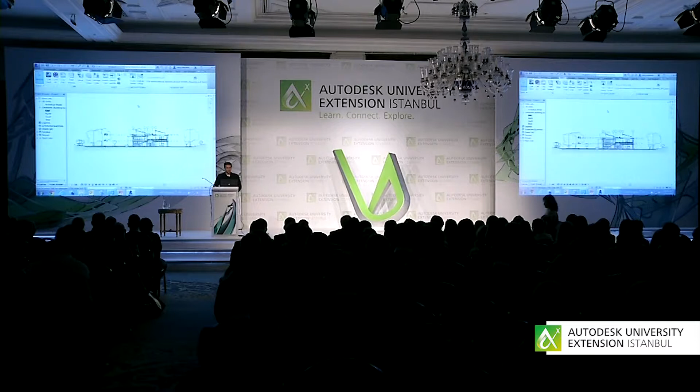What's really important here is that I need to copy the important elements. So I'm using the Copy/Monitor tool available under the Collaborate tab, select my link, then I need to copy. The first thing to start with is the grids and levels. These are the most important things. There's a little thing you have to do here first in the options. These are the 5 types of elements that can be copied and monitored: levels, grids, columns, walls, and floors. Structural engineers will not need anything else from the architectural model other than these 5 elements.

What you have here is a mapping tool. It gives you the ability to control how you want to copy when you copy/monitor. For example, I have a type here in the original file. How do you want to copy that into my structural file? I would say here, just copy the original type.

I don't want to change anything. When I talk about levels, usually the architect will use the finished floor level, but we as structural engineers want to use our top of concrete level, for example. So here I have the capability to make it minus 10 centimeters, or 100 millimeters, down of the architectural finished floor level. And then I can give a prefix, so I give it here top of concrete underscore, so whenever the levels are copied, they will have the initial top of concrete to differentiate them from the architectural levels, so I don't get confused.

Next thing, I'm going to grid. I'm fine with the mapping. I will continue with the grids, and I will give it just a prefix S for differentiation. I'll keep the columns right now as it is. I press OK, then I go to copy, select multiple. I will do this window selection and use this powerful filter tool to filter only the elements I want, so I don't have to pick elements one by one. I just select grids and levels, press OK, and finish. And Revit will automatically take care of copying that.

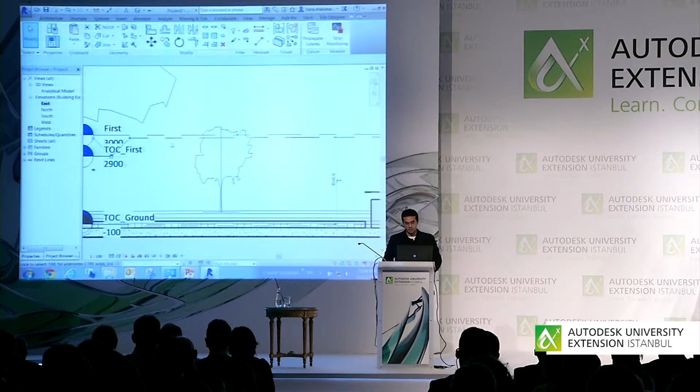If we move a little bit here to some of our levels, we will notice that these are our levels. I have top of concrete first, and up there the architectural levels. If I select that floor, you will notice this little symbol, this tracking symbol, showing me that this level is being monitored from the architectural model. In my model, I'm monitoring that level, so if any change happens to that level, I will be able to see it. The same happens here. I have the structural file, and the structural grids come to me.

At this stage, I need to create my views. It's not a problem. Let me just hit finish, go to view, create structural plans for the first, ground, and roof. And then I have my structural plans available. Let me hide the Revit link to show you something. Then I have my models. You notice that I have my grids only in one direction because I did that only from the east.

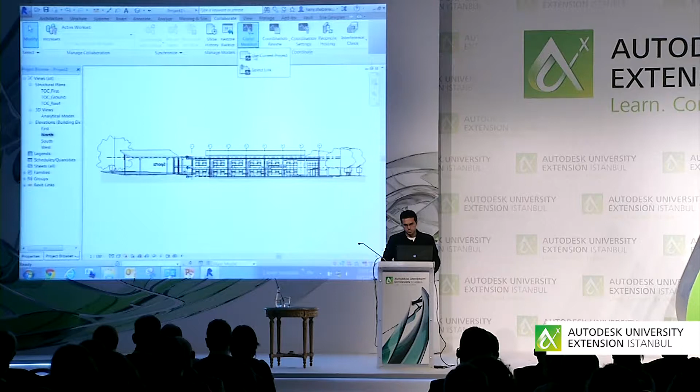So to complete that, I'm going to the north, the other direction, perpendicular to that. And I'm going to repeat that again: Collaborate tab, Copy/Monitor, select the link. I just need to press it again. Select the link, and it will open for me. At this stage, I will copy the rest of the grids in the other direction and also the structural columns. Before I do that, I'm going to the columns option.

Here you have the architectural column as it appears in the architectural file, and you have the mapping of it. So it depends how you want to copy that. You can keep it as concrete. In my example, I'm copying it to universal column, steel columns instead of concrete, because I am the structural engineer. I have control over that. I don't have to copy exactly what the architect is proposing. It's just a proposal. And for that column, I'll adjust it because I know it will be concrete, so I'll copy it as concrete. So I have control over that.

You have a little tick box here that's very useful. It's asking you to split the column by level. So if an architect creates a column from the ground till the 5th floor as one column, you know as a structural engineer that you need to split that column into different levels. So this option is very useful. You can just pick it and keep it in your system. Then I'll choose copy again, select my file, filter it. This time, I select the columns and the grids, apply OK, finish.

So finish now. If I go back to my top of concrete first, I have my columns, and also my grids are completed. So now I have my structural model and my grids, and both of them are monitored from the architectural model. Just to show you the split that happened, I'm going to hide this element. If I zoom in to any column, you'll notice that my columns are both monitored and split at my levels.

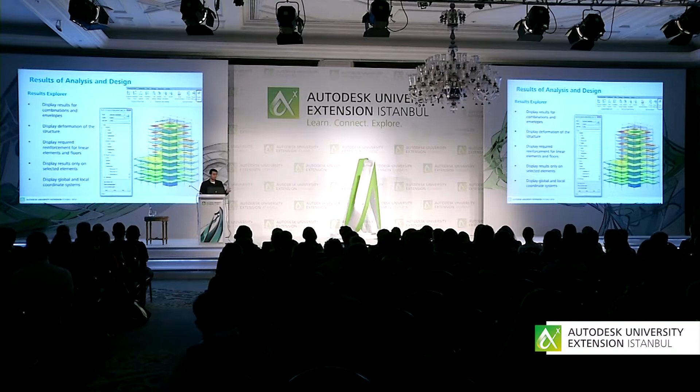So let's see now how this is actually happening. Now I'm in my Revit Structure. This is my physical model. I go to my toolkit, and by the way, you need to have an active subscription in order to access your cloud services. So once I do that, my model is being sent. First of all, Revit will check the integrity of my model, and if it finds any discrepancies, it will stop you and will say, there is something wrong. You have to check here.

So in my case, I have two errors in my model. First of all, I forgot to assign structural material to my floors, which is vital for my structural analysis. So I will have to assign structural material, definitely. So go to Revit Structure again, select the material and assign whatever material I want. And make sure that the mechanical information is available and assigned for that material. So here I've assigned a concrete material for my floor slabs. So here my concrete, I have my physical information, and the mechanical properties are identified here indeed.

The second thing is that if you have structural nodes that are not well connected together, you will get wrong information. Probably you'll get a failure in your structure. To address that, Revit 2014 actually introduced a couple of filters in Revit Structure to show you the unconnected nodes like these. They are under filters. They are out of the box. You can just activate them and give it a color. For example, give the unconnected nodes a red color. Once you press OK, then you have a visual report.

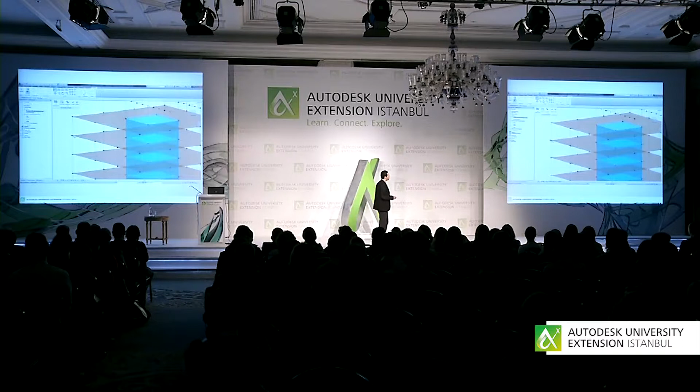So I have two unconnected nodes here. I can directly go and align them and make sure that my analytical model is correct. Again, for that column here, maybe this one doesn't appear in red because Revit automatically has created a rigid link between these two nodes. That's why it didn't appear in red. But to make it correct, I will connect them directly. So once I'm fine with that, hit OK and send my model again to the cloud for analysis. Of course, before I do that, I have identified the loads and load combinations, but just for the sake of time, I'm doing that automatically.

So here, my model will pass the different stages of checks, and it will be sent automatically. So here, my model is being sent to the cloud. It's asking me just to give it a name and how I want to save it, and then it will be sent. At this moment, my Revit is free. The model has been sent to the cloud, and I'm tracking the progress of my analysis. I don't have to wait until the analysis is done. The model is on the cloud, and right now I can proceed with my design. As a second iteration, I'm going to use the same model to send it to Robot Structural Analysis for more advanced analysis. So I'm using the tools.

You can see that once you hit the link Send to Robot Structural Analysis, the model will automatically go to Robot Structural Analysis and it will open for you. It's exactly the same model. So imagine how much time you saved by sending the same physical model and analytical model in Revit to Robot Structural Analysis. I don't have to recreate everything. I don't have to reconnect everything. And more importantly, these two models are linked together.

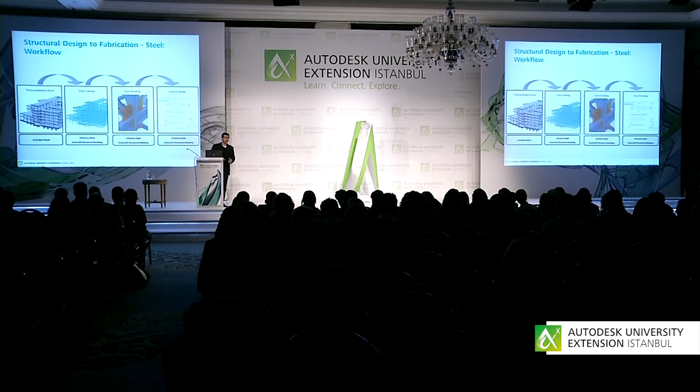Because of that, Autodesk, late in 2013, acquired a product called Advance Steel. Advance Steel is a BIM tool for steel fabricators to automatically produce the connections and create CNC information for fabrication. Let's have a quick look at the Advance Steel solution. Advance Steel is the BIM tool for steel structure detailing and fabrication. Using this powerful tool, you can automatically produce shop drawings and apply the most complex connections automatically and intelligently. If the physical member changes, the connection will adapt itself to reflect that change.

You can produce automatic shop drawings. When I say shop drawings here, I mean a single part, assembly parts, list of bolts and welds, the cut list with graphical representation on the sheet on how this part will be cut. You can also produce automatic bill of material, list of material or list of bolts automatically. You can run the clash detection, and all that happens while integrating the physical model, utilizing the physical model created in Revit, send that to Advance Steel without the need to rebuild the model again.

So what is Advance Steel really fit for? It really fits for any type of steel structures. It can be commercial, residential, plant design, or even a theater. So it's not limited to any type of steel structures, even miscellaneous structures can be used for.

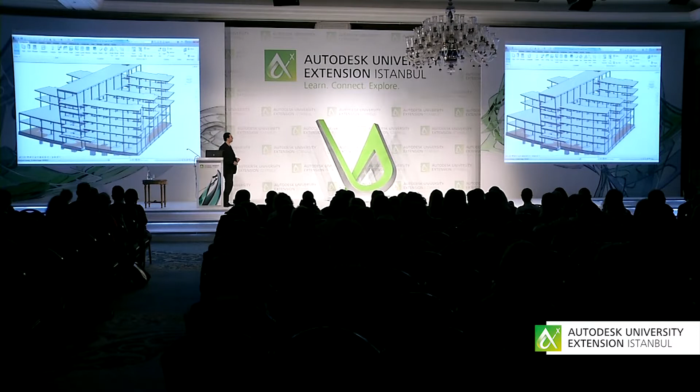So let's quickly have a look here at the integration between Revit and Advance Steel. Now I'm in the Revit environment. I'm just checking my column. I'm showing here that I have this column section. I don't need to do any manual mapping between Revit and Advance Steel. Simply identify my sections, use the add-in specifically for this integration, I have the export, import, and synchronize.

So either I started my model in Revit, or if I receive my structural steel part from a third party or a fabricator, I can import that automatically to Revit to have a complete integrated model together. So simply send the model, save that, and it will be opened automatically in Advance Steel.

Advance Steel, as you can see, works on top of AutoCAD. So you don't have to spend a lot of time learning the tool. The same commands you know in AutoCAD are applicable for Advance Steel, but with more advanced and intelligent connections that can be applied to our structure.

Here I've imported my structural model. I have different representations, as you can see, the same as you use the wireframe, the shaded frame, you have a realistic view. Select the same column. See, automatically I don't have to do any mapping. It comes directly, and I have the same cross-section, but with all the dynamic properties behind the section identified.

Let's use our connection vault here. I'll talk about it in a second. Simply choose two elements, and the connection will be applied automatically. Any parameter in this connection is parametric and intelligent. Parametric means I have full control of all the parameters, like the number of bolts, the edge space, the hole size I want to use, automatically controlled here.

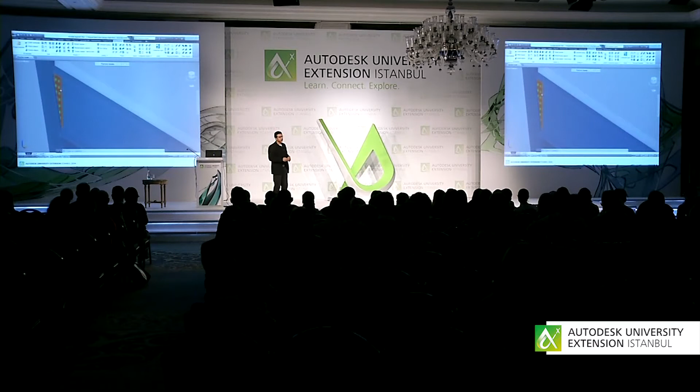So this is what you're seeing now. Actually, I don't think you're seeing the bolts correctly, but it's fine. So we have seen it right now.

Whatever you create in Advance Steel can update the Revit model as well. I don't really like that workflow of taking the model back to Revit because of the file size, because the actual workflow is once I finish my structural design in Revit, I should take that to Advance Steel and then move to Navisworks, which is the right tool for aggregating all models together in a really lightweight way, and run a robust clash detection and create a clash detection report. But if you want to update your Revit file, you can do that, as I mentioned before. So this is the connection vault available in Advance Steel.

They have a robust combination of steel connections, all dynamic and intelligent, and they are all grouped under different categories to make it easier for you to find them. Let's go directly to a live demo. This is the connection vault available in Advance Steel.

You can see that it's categorized, for example, as shear connection, moment connection, base plate; everything is categorized easily. And you don't have to check all these hundreds of connections every time you want to create connections. You can create a favorite list as you see here. Most of the steel fabricators that I know and worked with actually use around 50 to 70 connections, and they don't use the rest. These are their standards, and they can save them as well.

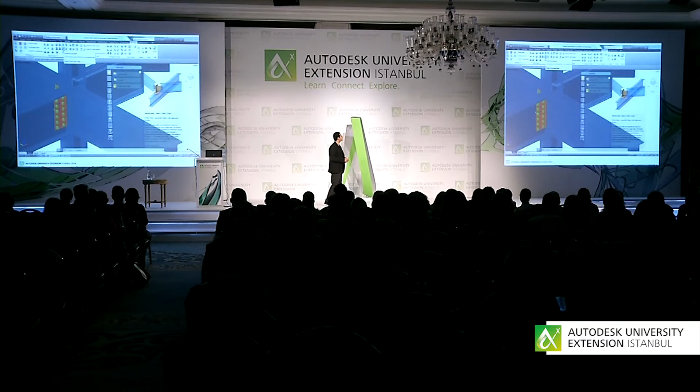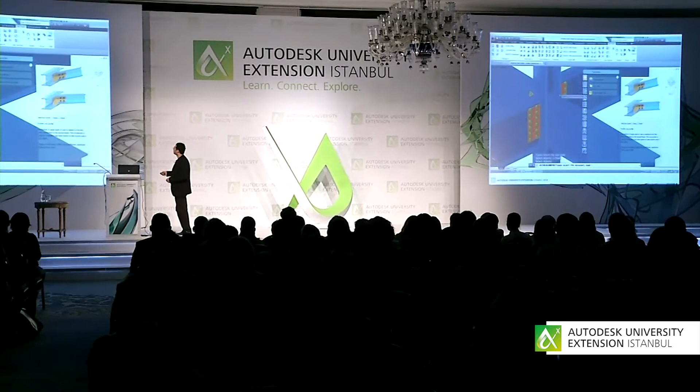As you can see here, I'm applying my parameters. I have full control of my steel structures over my connection. I apply that, and I can even copy the same intelligent component to the other side. What's really interesting here is that if I update the physical model, if I change the column size here for any reason, these connections will adapt automatically. So this is a level of intelligence that might save you time and make sure that your project is accurate.

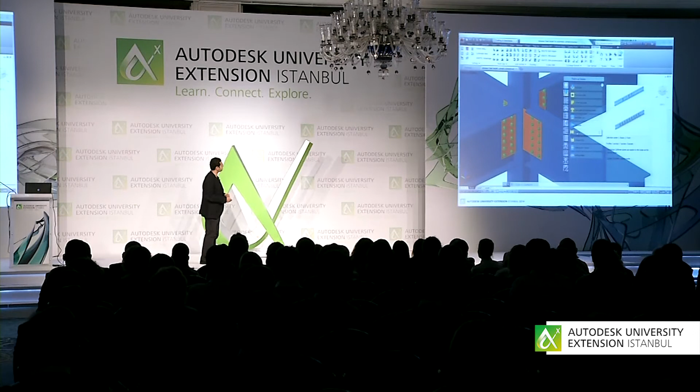Either you did that manually, or you did some update in the Revit model and updated the Advance Steel model, the connections will be updated automatically. So here I'm applying different types of parameters. You can see how the beams got cut back automatically without manual intervention from me, just by identifying the parameters. Here I'm adding some stiffeners to my project.

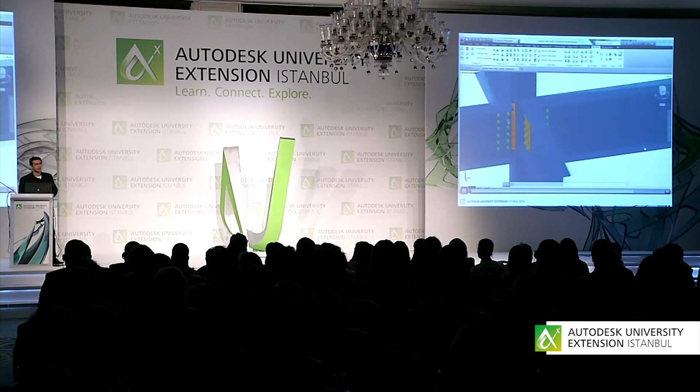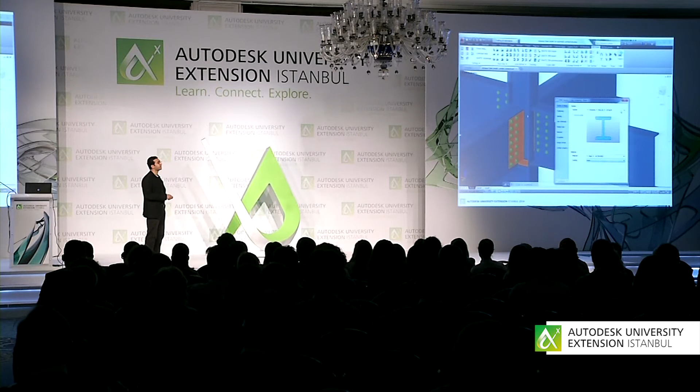Now I'm going to change the middle column. You can see now I have 4 connections. I'm going to increase the size due to design changes. Maybe the column section doesn't satisfy my design. Update the model, and my connections will be adapted automatically. And this is the power of BIM in the steel industry.

Again, we have a complete range of intelligent connections available for staircases and miscellaneous steel structures. Ready-to-use templates for shop drawings and GA. Here I created some samples of steel shop drawings and general arrangement drawings that can be produced automatically from Advance Steel. Of course, any change to the model will update the shop drawings and the bill of materials, and will also highlight the parts that have been modified, as you would expect from a mature BIM solution, where you have everything centralized with the BIM model.

Continuing to CNC files, this is really related to the fabrication shop. When they have the BIM model, they can automatically extract CNC files in different formats, DSTV or DXF, to go directly to CNC machines to cut out your parts. So if any steel fabricator is sitting with us now, he understands exactly what I mean: instead of spending time trying to understand the shop drawings, taking dimensions manually and feeding them into the machine, you can create, with the push of a button, a CNC file and take it to the fabrication shop to fabricate automatically.